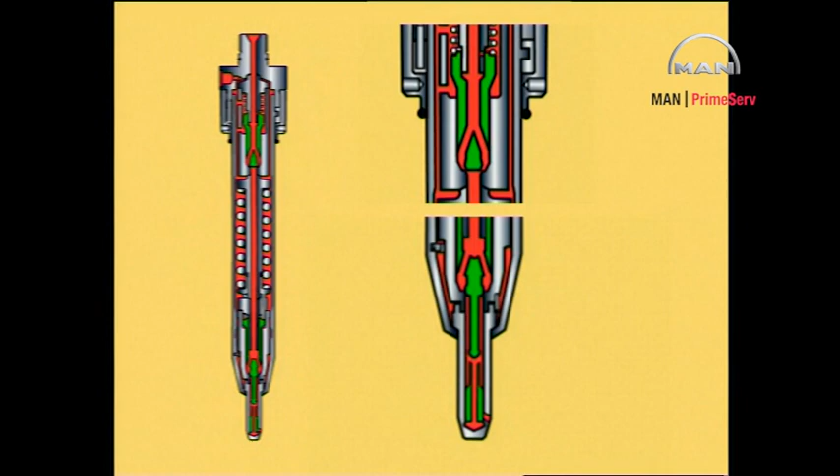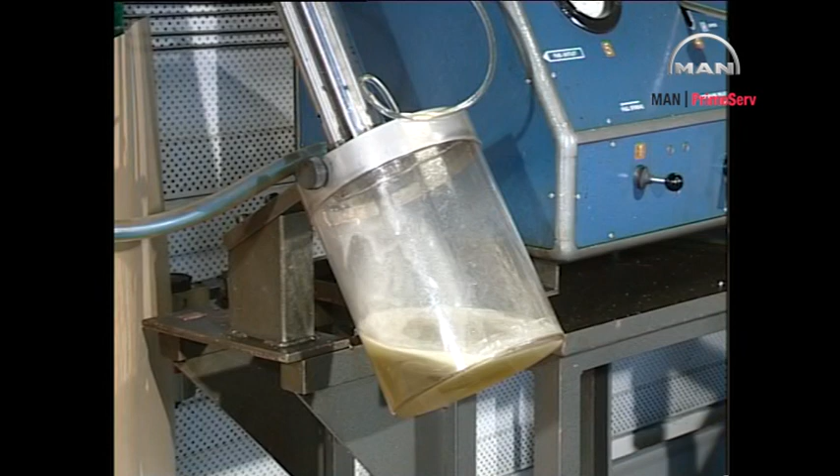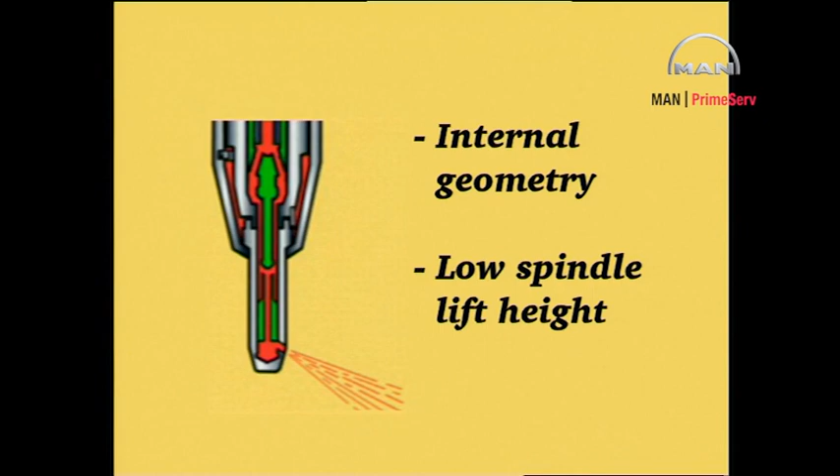Slowly increase the pressure until oil is emitted from the nozzle holes. Due to the geometry of the internal part of the nozzle, and because the height the spindle is lifted during pressure testing is lower compared to the lifting height during normal engine operation, the fuel oil will not necessarily flow from all of the nozzle holes.

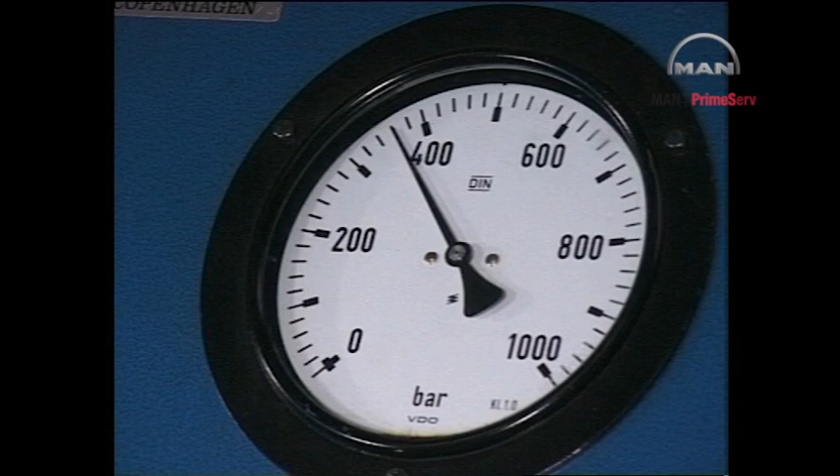Read the actual opening pressure on the pressure gauge marked opening pressure. Compare the actual opening pressure with the pressure specified in procedure number 909 and, if necessary, insert or remove discs or replace the spring. Do not insert more than 5 extra discs when adjusting the pressure. The fuel valve must be retested after any adjustment.

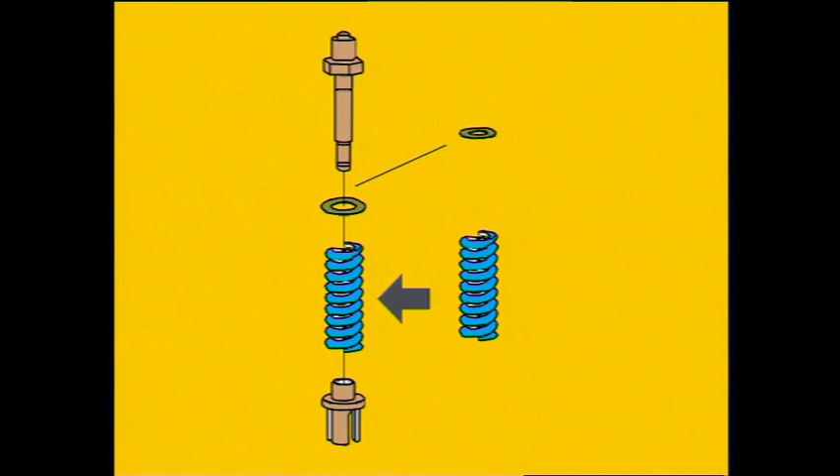Warning: do not attempt to carry out an atomization test on slide-type fuel valves, as this may damage the cut-off slide and nozzle. The height the spindle lifts during pressure testing is very small compared to the lifting height when the engine is in operation.

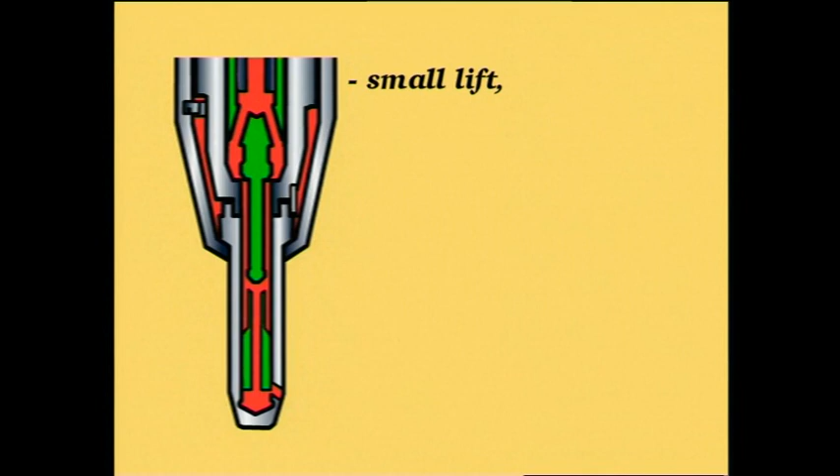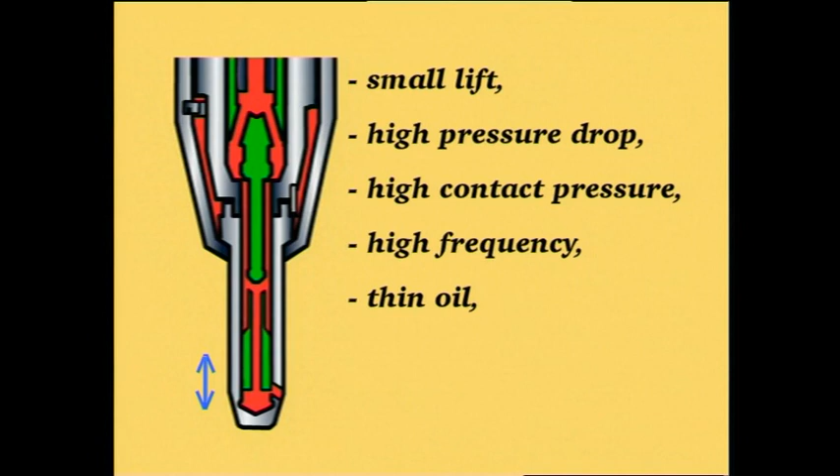This low spindle lift height leads to an abnormally high pressure drop across the slide and, consequently, an abnormally high contact pressure between the slide and the nozzle. Furthermore, the slide oscillates at a very high frequency. These conditions, in combination with a relatively thin pressure testing oil, may lead to a seizure between the slide and the nozzle.

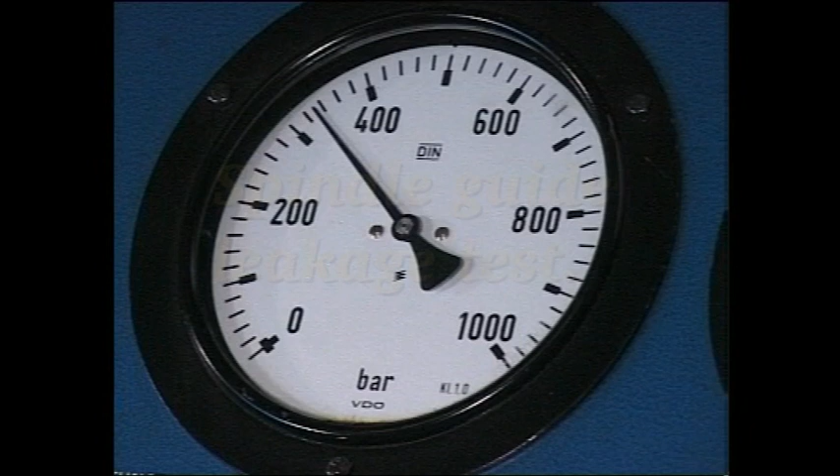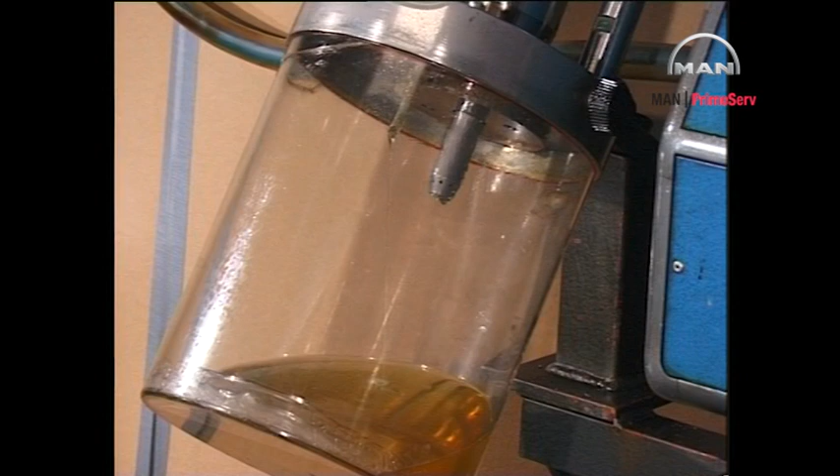Increase the pressure until it is about 50 bar below the actual opening pressure. There will always be a certain amount of oil flowing from the return oil pipe when the fuel valve is full of oil and pressurized. Oil must not seep from the fuel valve nozzle holes until a pressure of 50 bar below the actual opening pressure is reached. If oil does seep from the fuel valve nozzles, see procedure number 909.

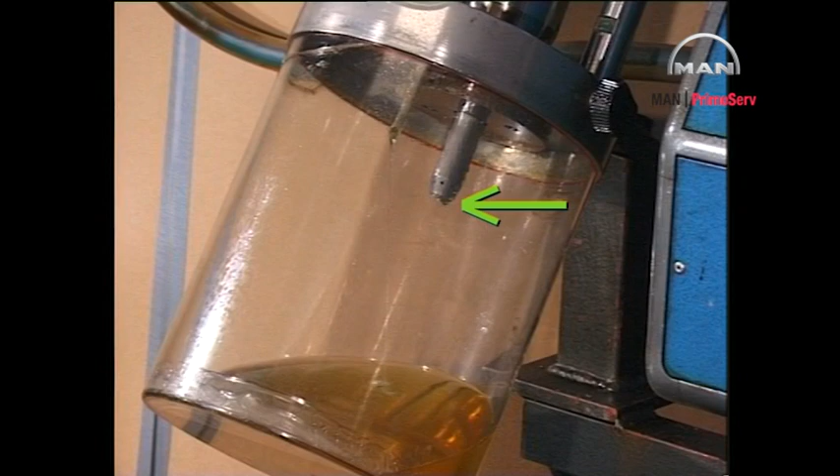Lapping of the internal seatings is not acceptable.

Increase the pressure to about 50 bar below the opening pressure and then move the control handle to the closed position.

The pressure will gradually drop to around 15 bar, whereafter the slide on the non-return valve will open and the pressure will drop very quickly to 0.

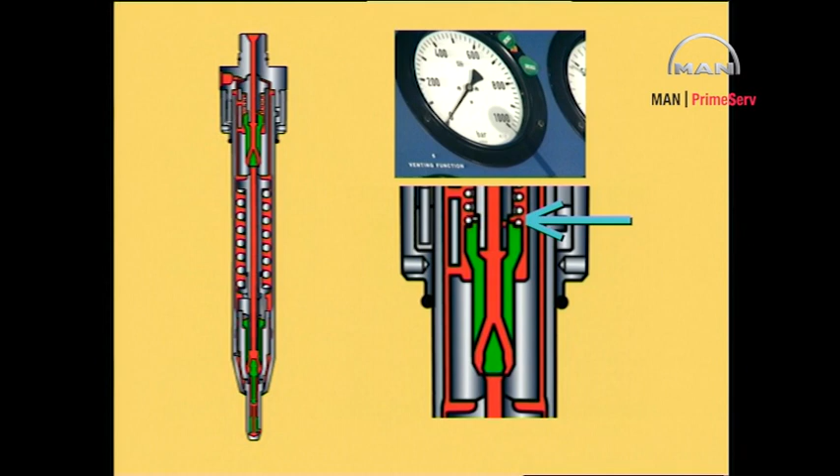If the quick pressure drop cannot be registered, the slide is sticking or the hole is blocked. Disassemble and examine the parts, replace if necessary.

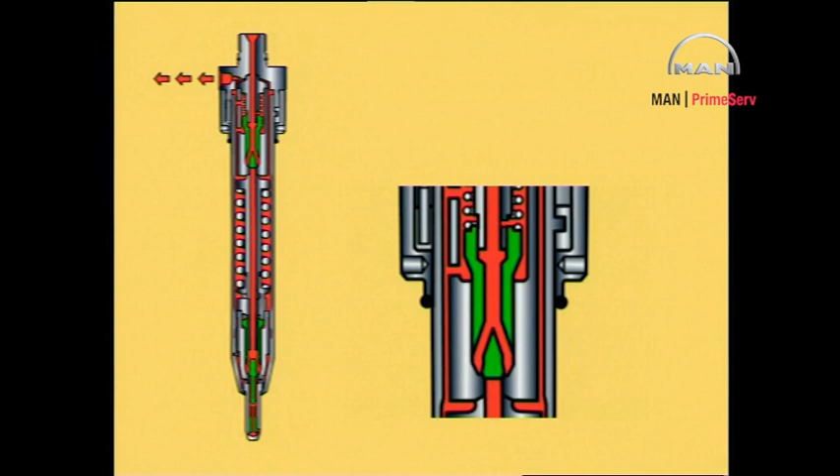Slowly fill the valve by pumping at low pressure until oil, without air bubbles, flows from the return oil pipe. Remove the return oil pipe and block the outlet hole with a gasket and a plug screw.

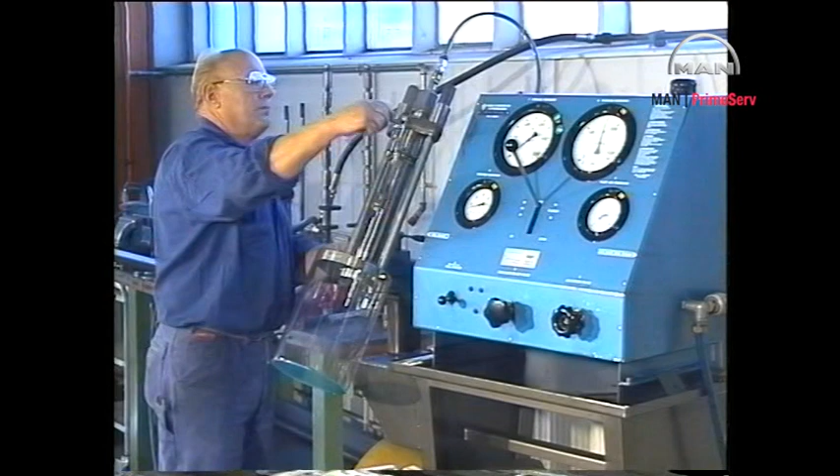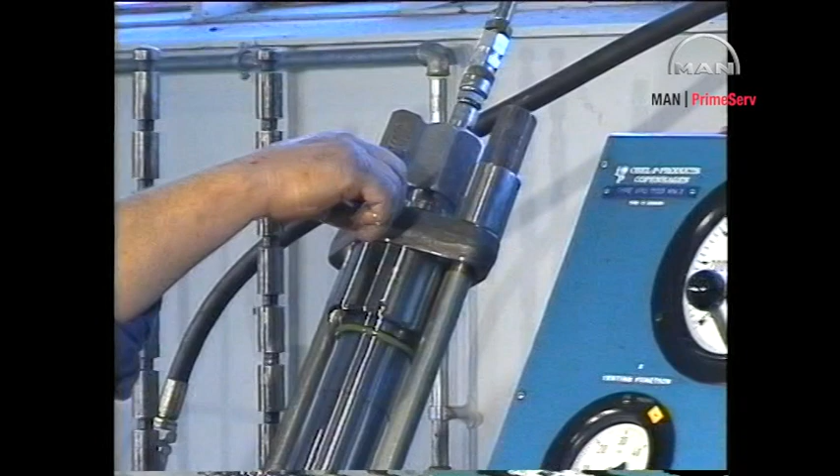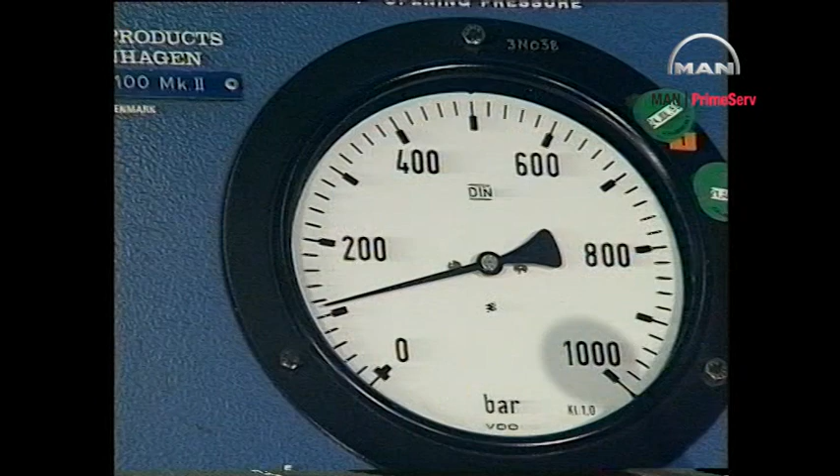Increase the pressure to about 100 bar and move the control handle to the closed position. The pressure should now remain at 100 bar.

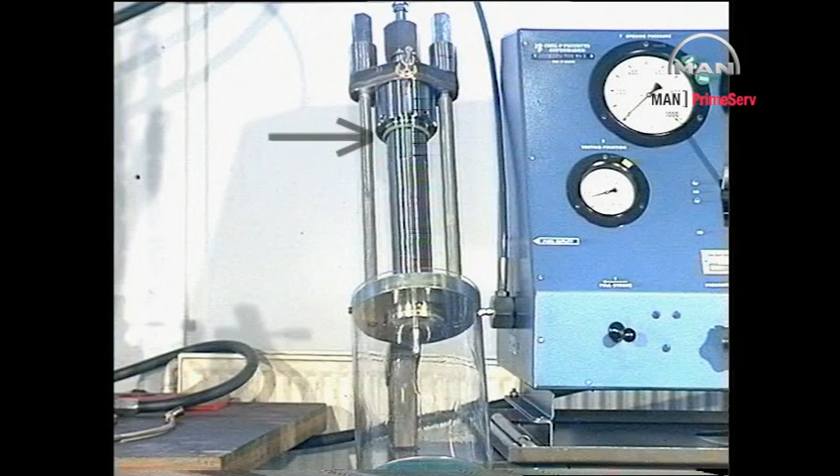If oil leaks from the union nut, replace the internal O-ring seal between the valve housing and the valve head. If oil leaks around the fuel valve nozzle, check the condition of the contact faces between the nozzle and the valve housing.

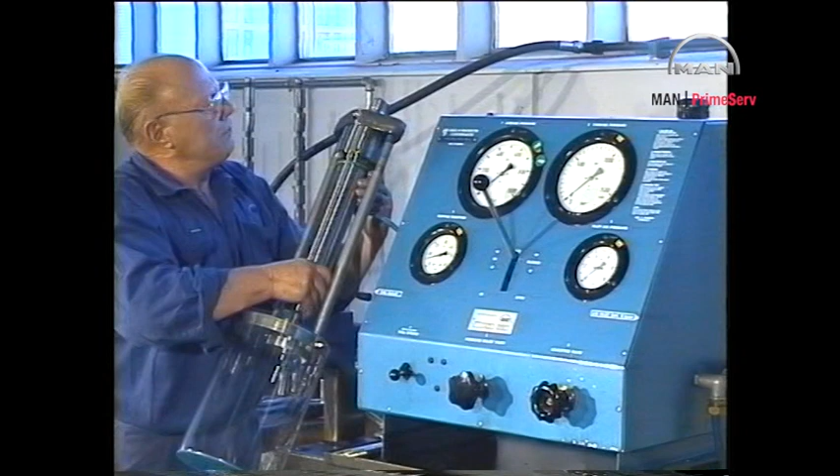After the fuel valve has passed all the tests, it can be mounted in the cylinder cover.